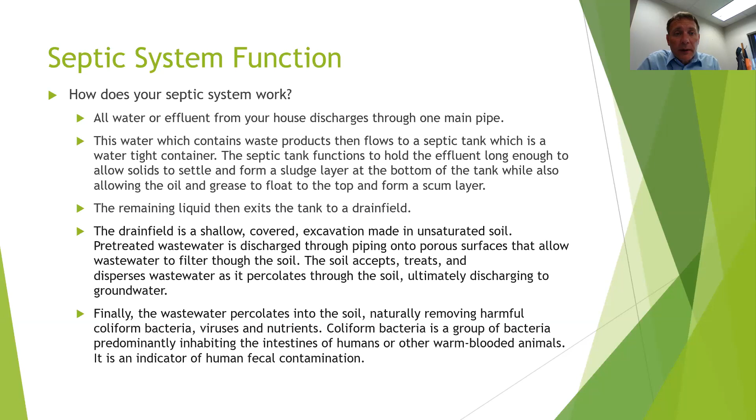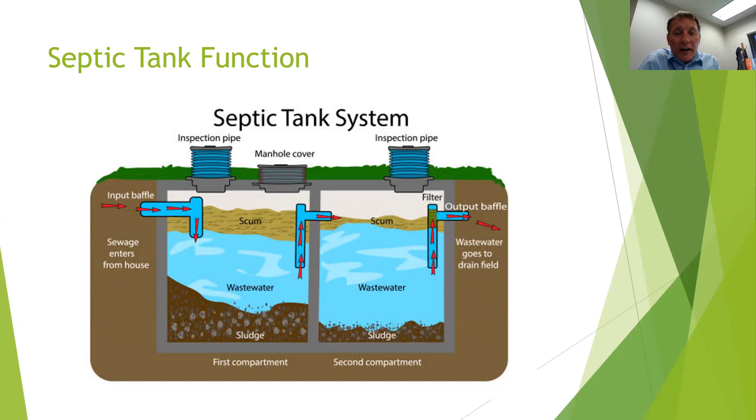One of the biggest misconceptions is that this thing takes care of itself. In actuality, you have to maintain it to get it to work for an extended period of time. We expect those systems, if they're properly maintained, to last at least 30 to 40 years. If you get 50 years out of it, you're starting to be on borrowed time.

Now, most of the soils in Garrett County, I expect I need to have that long lateral run because I get a lot of sidewall movement, and we get as much treatment moving laterally or down slope as we do vertically, because we get a lot of clay soils, and a lot of times we see this indicator called mottling, and that mottling shows up right between 36 and 40 inches, sometimes shallower. And what happens is when that water hits that confining layer, it slows it up and tends to want to pond it. So I like sloping sites because it helps move it away.

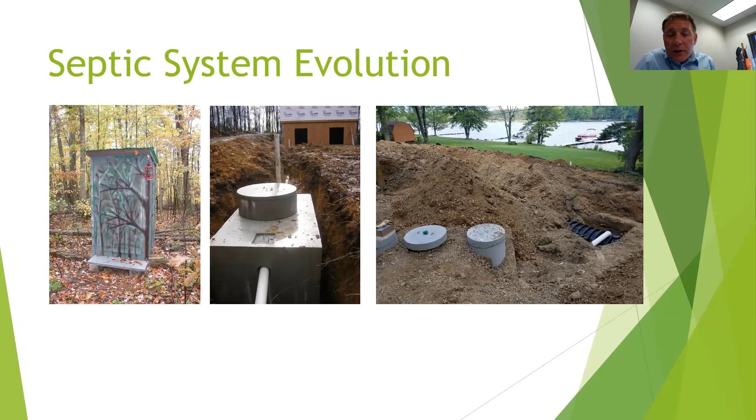The other thing that occurred in 86 is that well separation went from 50 feet to 100 feet. So that helped some, but it was mainly that deep hole that allowed us to say we need 4 feet of unsaturated soil that's not going to pond that sewage, to treat the coliform and E. coli and reduce other things like BOD, nitrates, phosphates.

So everybody's probably aware of the Bay Restoration Fund. The Bay Restoration Fund was initially put into place to upgrade all the treatment plants. And in fact, part of that money is being used to pick up a community. We're getting ready to upgrade Oakland's plant. It's been in the works for a couple years, and it will employ the best available technology for public sewage.

But that funding that you pay in your taxes was used to upgrade all the plants. And of course, Garrett County, we're usually the last to see that money. It always flows west. But with that money that comes to us, we had a community that's being picked up with the bay restoration money. And it's going to take away about 50% of about 40 homes that still have direct discharges. So a lot of good work goes with that bay restoration money.

So in our office, we apply for a grant annually, and this has happened for about the last 10 years. We apply for part of that bay restoration money, and we use it to install best available technology for private septics. This best available technology is basically like a small package treatment plant. There are several different technologies approved in the state of Maryland, but we primarily install just two, because we don't have the vendors or manufacturers that will support the other technology out here.

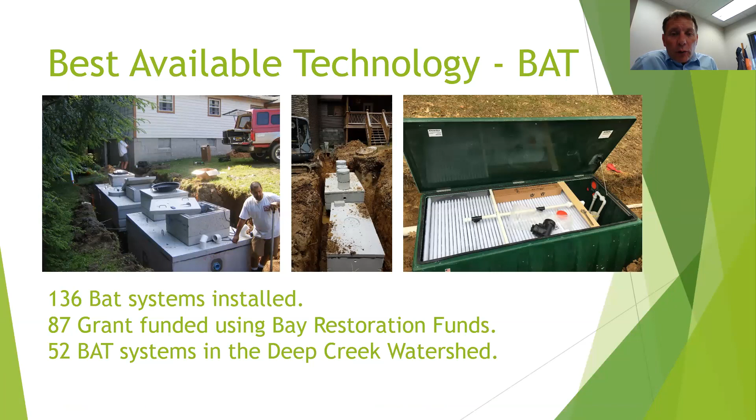Now, there's also things called a distribution box. And we do not use distribution boxes in Garrett County because what we found over the years is it's a part of the system that has to be maintained. And I struggle to get people to pump their tanks, let alone maintain a distribution box.

But in actuality, the best functioning system is a system where I can take the effluent from the tank, put it into a distribution box or a pump to the drain field, and we can send all the effluent to all the drain field all at once. The more I can disperse it, the longer your system will work.

So on a sloping site, we use what we call dump and fill. So it's going to fill up the upper trench. And then once that trench is filled, it will flow down to the next trench down, or sometimes there may be 5 or 6 trenches, and each trench will take in the effluent.

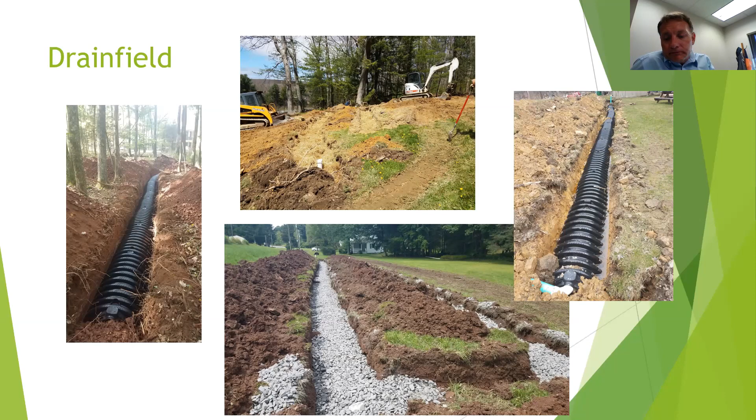Okay, great. Thank you. Okay, the other question: is there a way to know if you have a chamber system or a gravel and pipe? We keep a record of all the septics installed in the county, so anybody that would need to find your tank or find the drain field location can look. Some of the drawings are very accurate, and some of them, before '71, when you sent in your own drawing, you look at them and go, I'm not sure what's north, east, west, south. But if you can figure out where the plumbing goes out of your house, and of course it always runs downhill.

That's what I've been able to figure out. If I can figure out which direction it's going, I can usually get a basis of where the tank is and where that drain field's located. Even on those systems that were installed in the 60s and 70s, I can usually go out and look at the ground. Of course, grass always grows greener over the septic, and I can usually determine from some general depressions in the ground, where the grass is greener, where I'm getting nitrates to the surface, just how well the system's performing just by looking at it.

Wonderful, thank you. And if someone has to get a new septic tank, are they eligible to apply for the Bay Restoration Funds? You kind of hit on that, it's only for failing, but. Yes, and of course, I get a limited amount of funding. The systems have become, just like everything else, very expensive. We get 100,000 every year, but usually I apply for some additional funds. So I get about $150,000 a year, and that helps to install 5 systems.

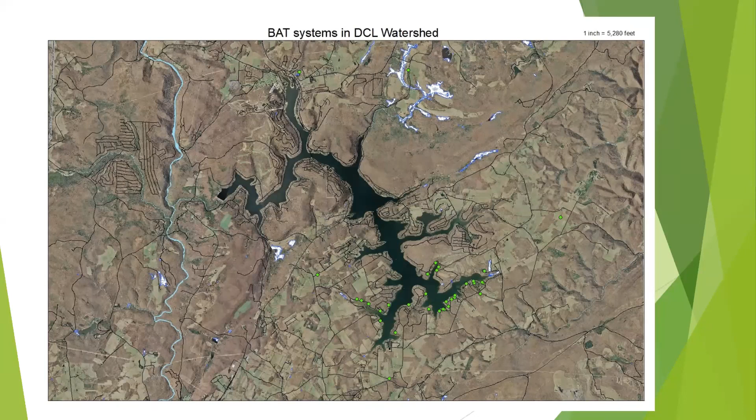Okay, great information. And we have another one. How can you tell for sure that an old septic system is not functioning well and needs to be replaced? Are you going to address that later? Yeah. I get into a little bit of maintenance stuff at the end, so that's coming up real quick.

So our GIS is down. For those of you in Maryland, we had a malware attack at DHMH, and it's wiped us out, and we've been down without computers for 6 months. So I don't have any GIS, so my map isn't quite up to date. If you go to count the 52 dots on there, they're not on there. But you can see the purpose of this map is to show where I'm installing the majority of those systems.

So you can look at that and see that the northern part of the lake is mainly public sewer now. And my goal before I retire, I hope, is to get public sewage to this southern end of the lake. I think it should be a huge priority for the watershed, a huge priority for the county. The problem is the treatment plant is located all the way over there by the dam, which is, not sure if you can tell, sort of the westernmost portion of the lake there.

So the only way to do that, to get sewage, is either a major upgrade on lines, which is expensive, or we build a new plant or send it to a different plant. So we've had discussions about sending it to the new Oakland plant. The problem is when we go after this funding, they don't build growth into it. So the money that they give us for plant upgrades are for existing infrastructure.

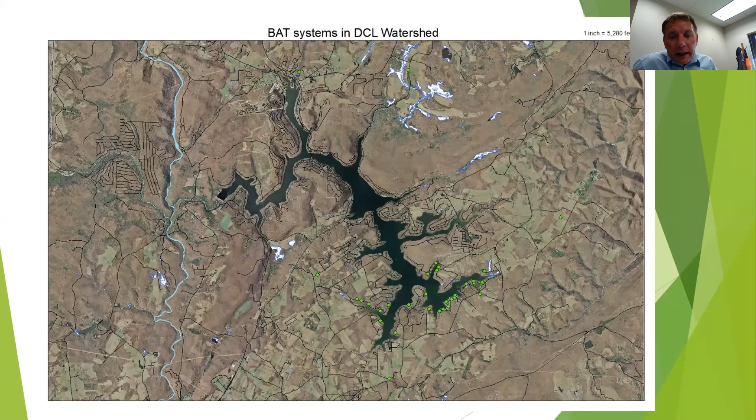So this is just a close-up of those, and you can see I have a lot in the Hazelhurst, Green Glade, Penn Point area. And if you were to have all the 52 dots on there, that area in Green Glade, Hazelhurst, Stock Thompson, those are where the majority of the systems have been going in lately. Of the funded ones, we're putting about 8 to 9 a year in that area right now.

So almost everyone that does work out there, and it's primarily driven because the lots are just so small. There was no repair area built into what to do in the future. The repair that I'm doing is closer to the lake. The soils are poor, but what has happened since COVID, and it's a reason why we need to get sewer here, is because everyone you talk to, and I know it myself for 30 years of work, the southern end of the lake was the quiet end, and development and rentals, although they existed, it wasn't near what we saw on the northern end.

And we do a lot of work with those rentals in the transient vacation rental program. So we license all of them, and that growth rate of vacation rentals on the southern end just in the last 2 years is just crazy. And there's no slowdown to it. And what I found is a lot of these homes, I'm not even allowing to turn over to a rental. I look at the septic system and we see that rental as what they call a change of use. Let me give you an idea.

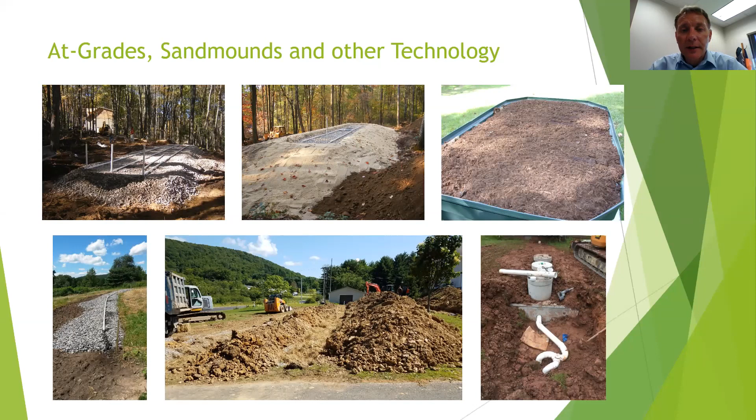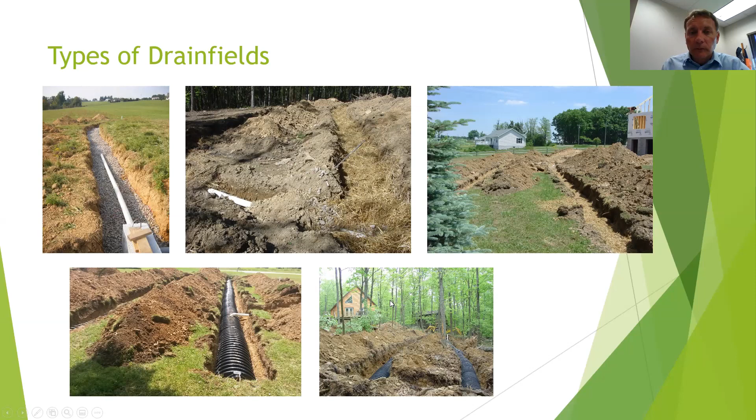We do a few plastic tanks, but when we refer to chamber systems, it's always that plastic dome, that half plastic. It's basically like the top half of a culvert pipe. So it looks like a culvert pipe, but there's nothing under it. It's just open underneath, just lays right on the ground. Does that sort of answer that question? Yep, that's great. You want to go ahead and move on?

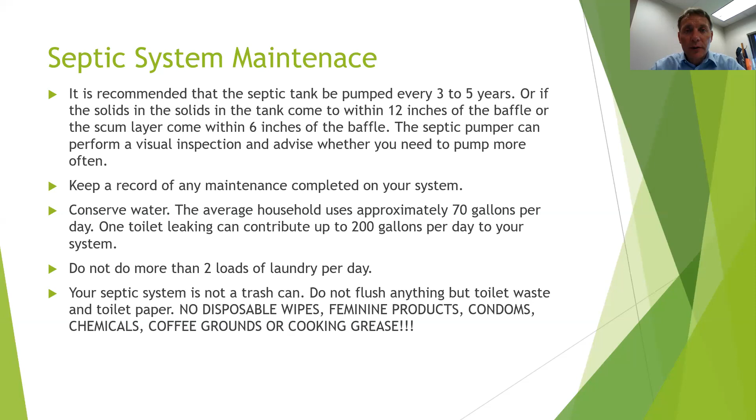Those things do not break down and basically just eat up that area you have for sludge layer, especially cooking grease. People all the time send cooking grease down the drain to a septic. Man, you are just killing your tank. Take that stuff and let it harden and put it in your trash can, or take it out to compost. Always recommended.

Craig, there's one question about no chemicals. Your list says no chemicals. What does this include? Any recommended soaps, any cleaners that we shouldn't be using? Well, there isn't really any good chemicals for your septic. I mean, obviously some are harsher, bleaches. There are a ton of septic friendly chemicals out there, and you can usually look at them, but all of them are going to have a certain toll; they're going to wipe out that bacteria load.

And I have been to houses where certain people clean too much. I'll go into that house and they have that house that you could eat off the floor. And you know why I'm there? To fix the septic system. And I'll say, you can't clean as much. And they can't get that through their head. But that's what they do. They clean so much, they're bleaching everything. They're dumping their wash water down into that septic system.

Well, once you kill your bacteria load off, it takes a long time to recharge that bacteria load. And the bacteria work the same. They say the solution to pollution is dilution. They used that for years and years.